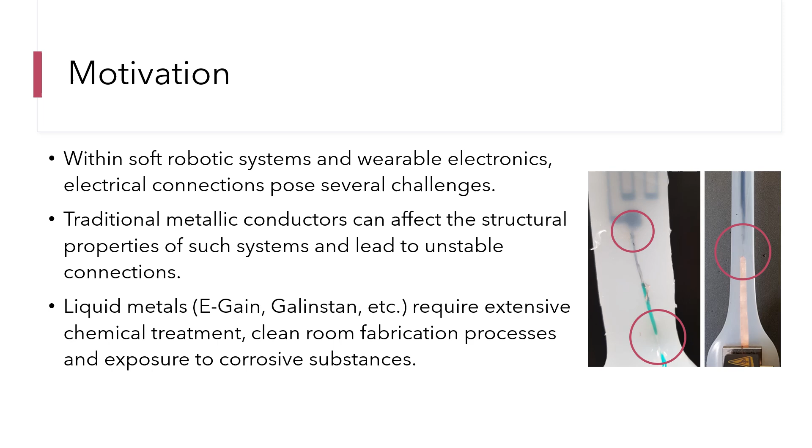Recently, liquid metals like EGaIn have been used as wires and interconnects for highly intricate stretchable circuits for microelectronic components. However, fabricating soft mechatronics with liquid metals requires extensive material processing, handling of chemicals, and clean room techniques.

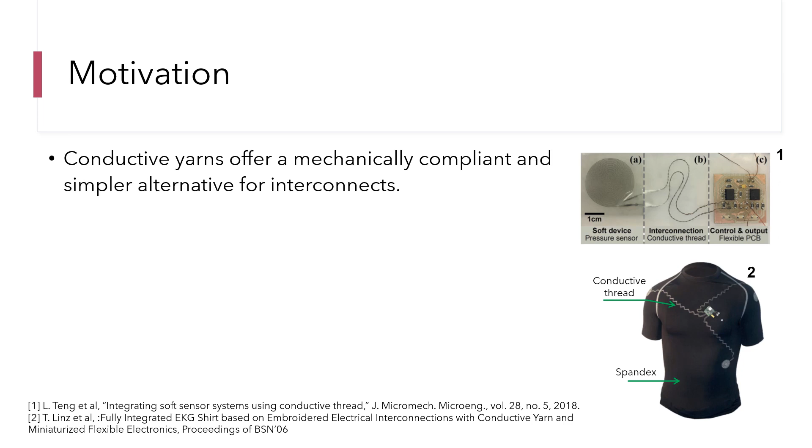Commercially available conductive yarns have been used in wearable electronics as well as several elastomeric and fabric-based sensor systems. These threads can easily be integrated either manually or using simple automated fabrication processes. Yarn-based stretchable interconnects can be formed by stitching the yarns on stretchable fabrics. However, stitching results in strain-dependent resistances due to the interaction between the stitch structures. Moreover, stretchable fabrics such as spandex have been shown to add significant constraint to highly deformable substrates such as Ecoflex or Elastosil, the kind that are commonly used in soft robotics.

Automated deposition of conductive yarns in soft substrates is challenging due to the bending rigidity of the yarn and out-of-plane moments created by bending the yarn. Moreover, soft substrates do not offer heavy anchors to place the yarn or to keep them in position.

This presentation entails the design and automated fabrication of conductive yarn-based flexible interconnects, or FFI. Through analytical models and experimental validation, it has been shown that the FFI can be robustly integrated with soft mechatronic systems without adding significant mechanical constraints to the system.

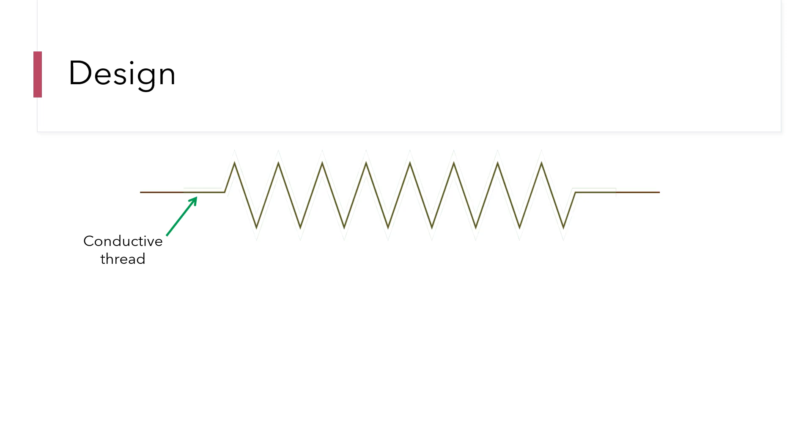The proposed FFI design consists of an inextensible conductive thread embedded inside a flexible silicone elastomer pattern as shown in the figure. The conductive thread acts as the electrical core, whereas the elastomer serves a threefold purpose. One, it provides electrical insulation. Two, it forms a strong chemical bond with silicone-based substrates used in soft mechatronics. And three, it enables large strains without adding constraints to the soft substrate it is embedded in.

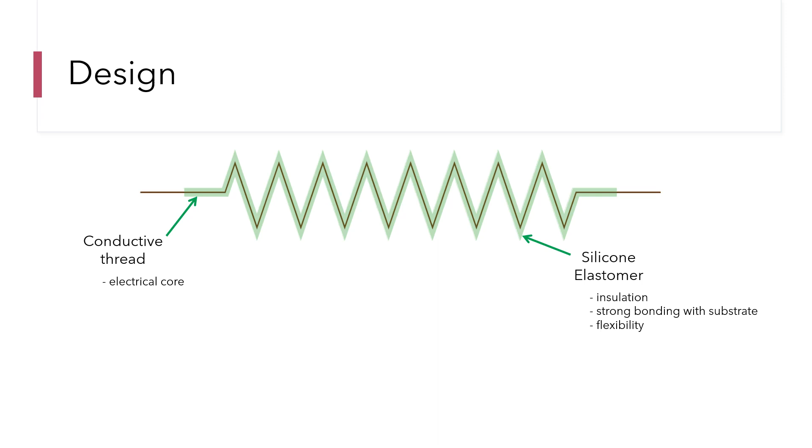To simplify the study, we explore a simple meandering or zigzag pattern in detail. However, FFI of other flexible patterns can be possible as well, such as horseshoe patterns or serpentine patterns.

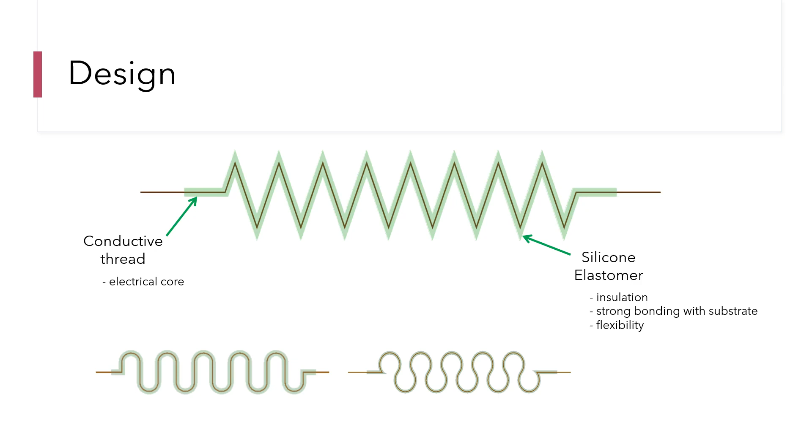In order to embed these interconnects in soft substrates, it is essential that they don't add any mechanical constraint or disturb the desired deformations. Hence, it is important to model the maximum strain given by epsilon max and expected stiffness given by E design as a function of design parameters such as geometry and insulation materials. For this model, we assume isotropic properties along the entire length of the interconnect and neglect out-of-plane deformations during elongation.

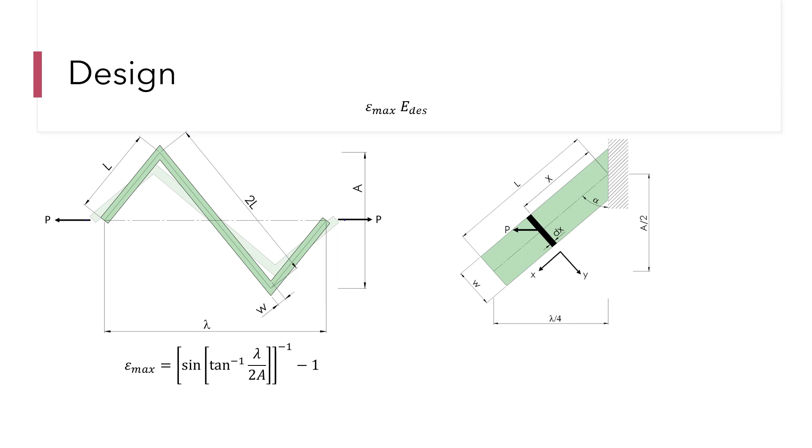In order to calculate the design stiffness of the interconnect, Castigliano's energy theorem, which relates the elastic potential energy capital U, force load capital P, and displacement u, is applied on a quarter cell fixed to the axis of symmetry. Upon solving the energy theorem, the effective modulus given by E design is given in the equation on the right. Here, A_p refers to the cross-section area, E and G are Young's modulus and bulk modulus of the insulation materials respectively, and I is the moment of inertia.

Using these two equations, geometry and insulation materials of the FFI can be chosen to create interconnects which are suitable to be embedded in specific hyperelastic substrates undergoing a desired range of strains.

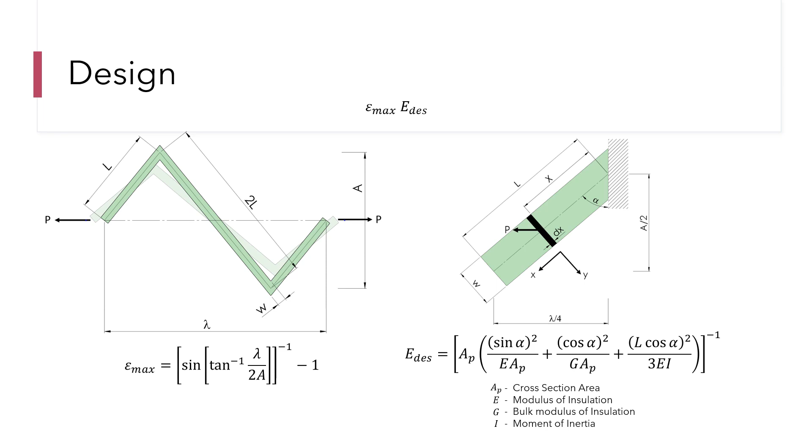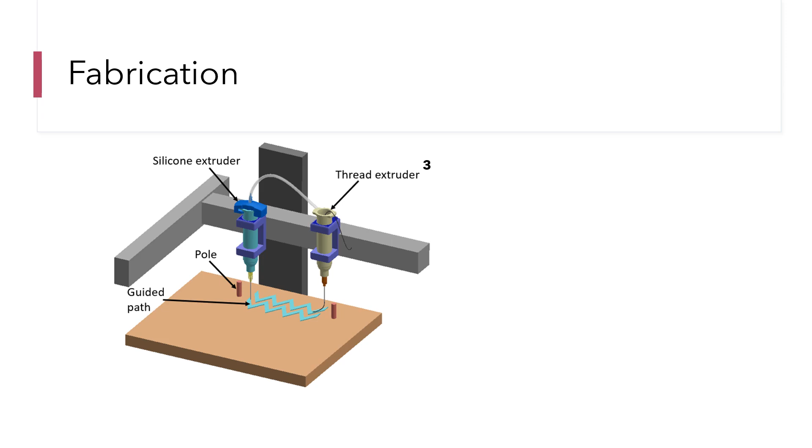Once the design is complete, the FFI is fabricated using a custom 3D printer shown here. The 3D printer consists of a dual extruder capable of dispensing the insulation material using a compressed air dispensing system, here shown as the silicone extruder, and another extruder capable of layering the conductive yarn using a pole-based automated fiber embedding method developed previously by our group, here shown as the thread extruder.

The fabrication consists of 3 steps. First, the guide walls of the flexible pattern are printed using the insulation material by direct ink writing as shown. The rheology of the insulation material is modified to make it more viscous and support layer printing. Once 4 layers of the DIW guide walls are printed, they are cured at 60 degrees.

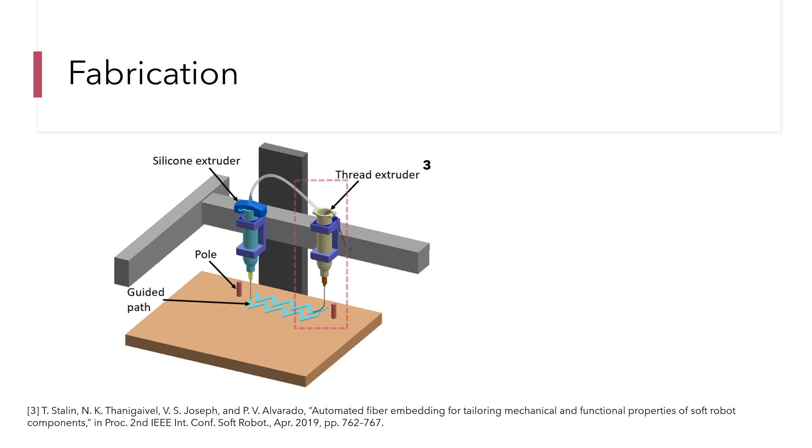Second, the yarn is laid between the guide walls. As shown in the video, the yarn is held by the guide walls despite the sharp bends. Third, the gaps between the guide walls and around the yarn are filled by depositing more of the insulation material. The rheology of this material is modified to make it less viscous so that it flows freely in the gaps.

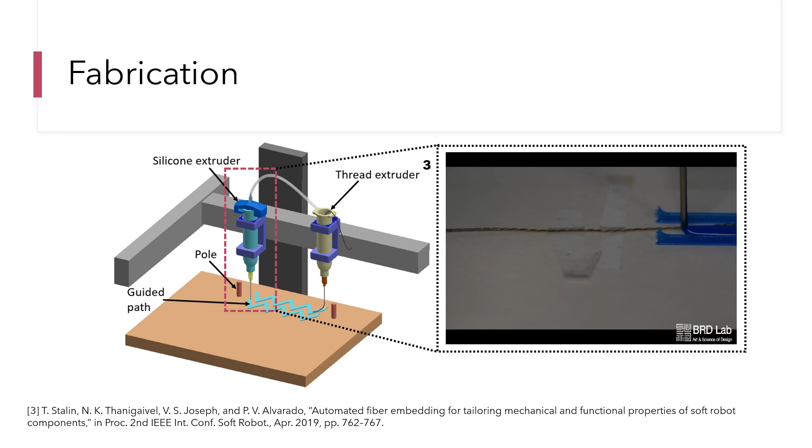The conductive yarn interconnects can easily be crimped to traditional connectors like crocodile clips, JST connectors, and so on. To evaluate the electrical and mechanical performances of the FFI, 4 patterns of different wavelength and amplitude were printed. The blue patterns shown here are cast into dog bones of Ecoflex 00-30 substrate. The geometries of the 4 patterns can be seen in the table. Using the model developed previously, design modulus E design and the maximum strain epsilon max for each pattern has been calculated and shown in the table as well.

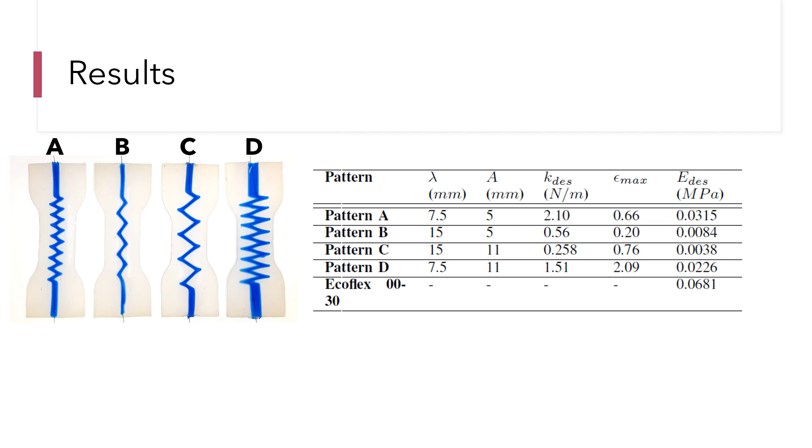The dog bones were then subject to uniaxial tests. The solid curves in the plot show the experimental stress strain data. The curve in blue shows the experimental data for pure Ecoflex, which is used as a benchmark for the composites. As we can see from the plots, for each pattern there is a range of strain for which the composite behaves almost like pure Ecoflex, thus proving that in this range of strain, it does not constrain the substrate at all. The vertical dotted lines in red, green, cyan and black highlight the predicted strain limit or epsilon max, after which the yarn would start to constrain the composite.

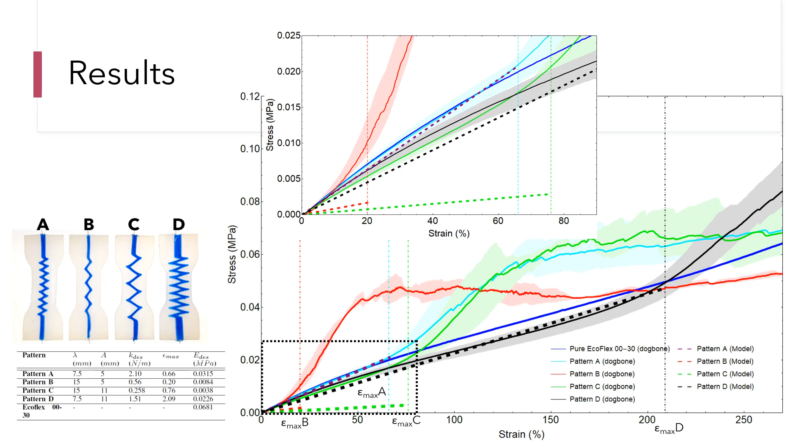The constraining of the composite happens at strains close to the predicted values of epsilon max. Pattern D also can be seen to have a strain range of 200%. The thick dashed slopes represent the predicted stiffness or modulus, E design, for the patterns. For all patterns, the predicted stiffness is lower than that of the benchmark or the blue solid curve of pure Ecoflex.

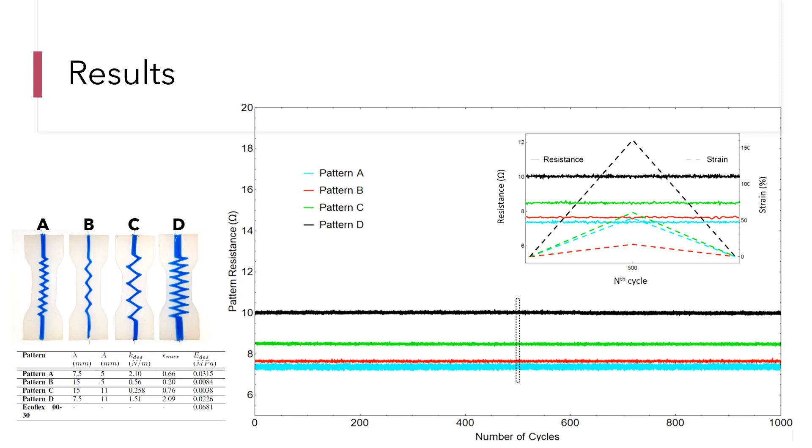To demonstrate the electrical stability of the FFIs, the resistance of the interconnects was measured while the dog bones were subject to cyclic uniaxial loading for 1000 cycles. In each cycle, the dog bone was stretched to 80% of the maximum strain, or epsilon max. As seen from the figure, the values of resistance measured remain unchanged over the cycles. The inset in the plot shows the variation of resistance and strain over one cycle.

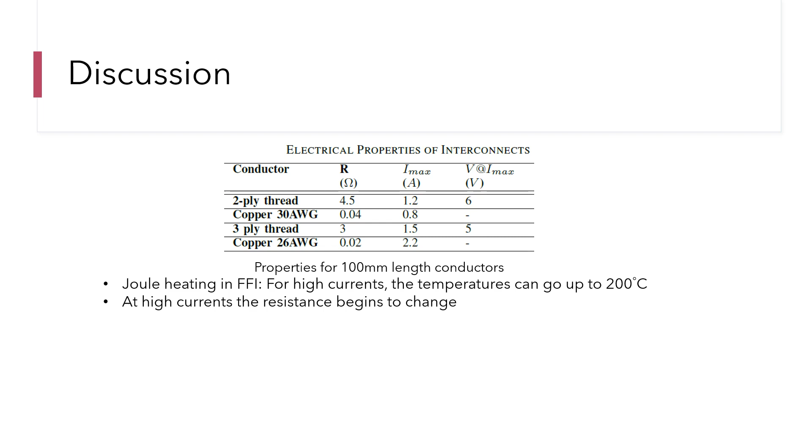Compared to copper wires, conductive threads are limited in their current carrying capacity owing to their large resistance. During tests, it was seen that 2-ply and 3-ply conductive yarns could carry a maximum of 1.2 and 1.5 amperes of current. The conductive yarns heated in excess of 200 degrees while carrying 2 or 2.2 amperes for a period of 10 seconds.

While the current carrying capacity of the FFI is limited, they offer significant mechanical advantages compared to traditional interconnects. They are ideal for connecting data transmission such as TX-RX systems, sensors, and low-energy actuator components in soft robotics.

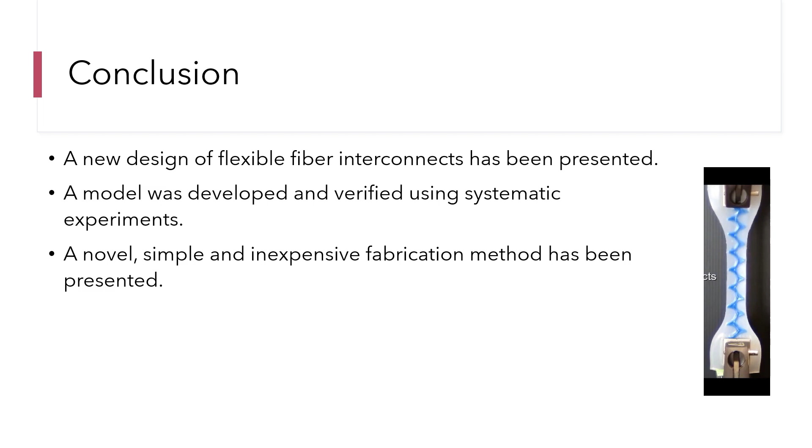So to conclude the study and its findings, a new design of conductive fiber-based flexible interconnects has been presented. To support the design, a model was developed to estimate the stiffness and elongation of the interconnects and later verified using systematic experiments. A novel, simple, and inexpensive fabrication method has been presented to produce various kinds of flexible interconnect patterns. The flexible interconnects can be used for embedding within soft mechatronic components for actuation, sensing, and various other applications while also being suitable for use as external flexible cables.

Further work would be targeted at studying the effect of interconnect contact on sensing as well as its effect on signal-to-noise ratios. Besides, the effect of metallic coatings on the resistive properties of conductive fibers is also worth investigating.